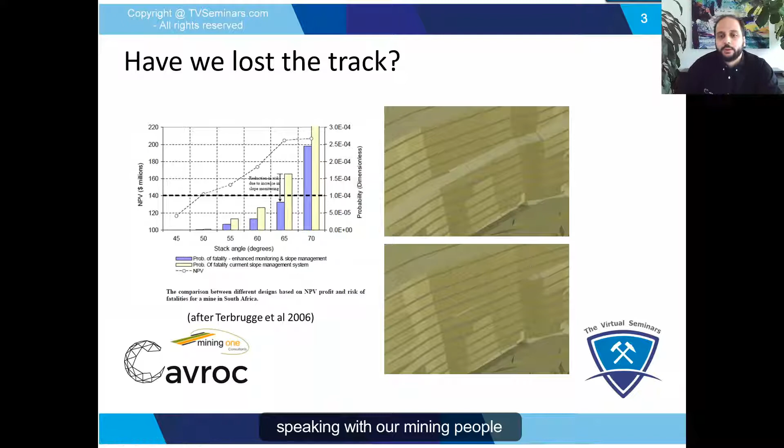The open pit example is another one. The one on the right-hand side is again a project that I was involved in, and the left-hand side shows a well-known paper that shows how much impact as little as a few degrees change in slope angle can have on the economic viability of a mining project. That decoupling berm you see there, as I said, we were involved with the analysis, and speaking with our mining people, adding that decoupling berm, which is a geotechnical berm, basically removes $50 million value from that project.

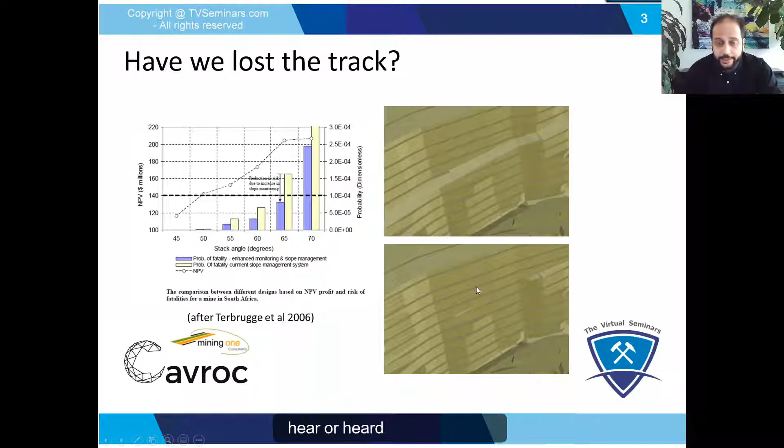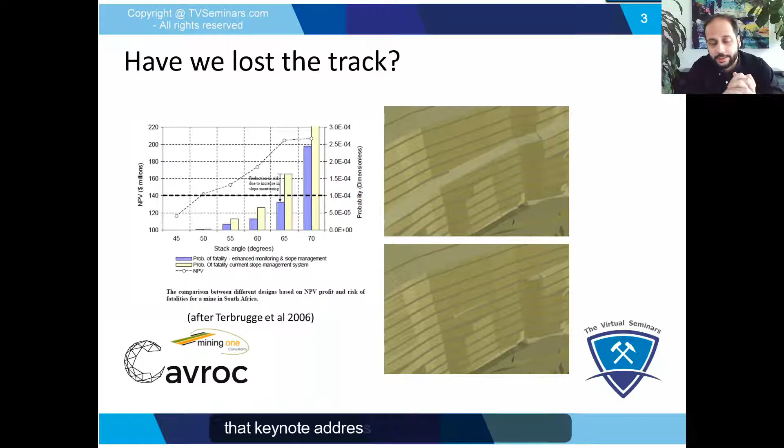When I heard these numbers more and more throughout my career, the last 15 years in consulting and in the industry, the first question that came to my head, and I think that's the main point related to Dick Stacey's keynote address, is: if what we do as rock mechanics practitioners and geotechnical engineers is this significant, are we actually confident that what we do is defendable, reliable, and accurate?

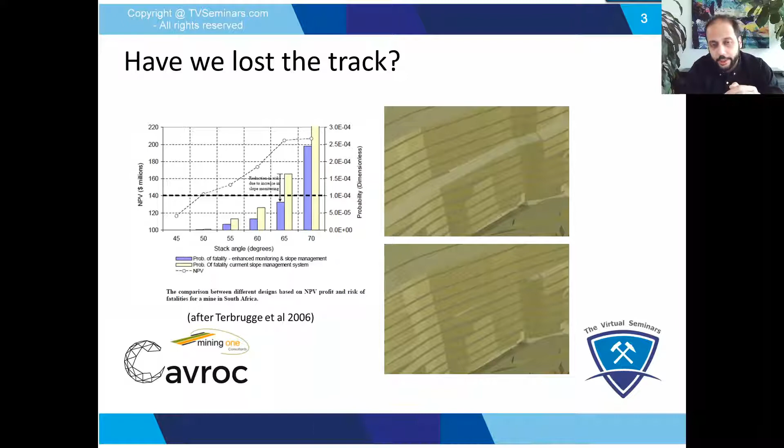Because the consequences, both from a safety perspective and economic aspect, is quite significant. But what do we do? So what is the state of practice?

Firstly, I just want to highlight that we are not trying to point fingers at anyone here. This is state of practice, used by all of us for design. This is what the majority of our industry relies on, because these methods are practical, faster, cheaper, and easier to learn and implement. But at the same time, a big portion of engineers know the limitations of these methods as well.

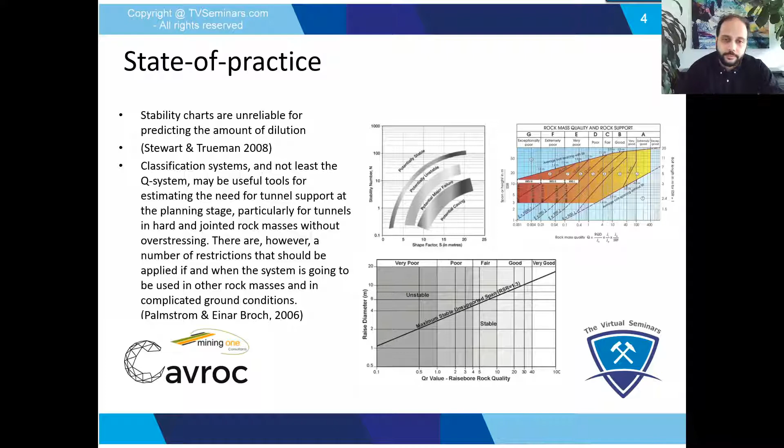Another example, open pits. Equally, we are using limit equilibrium and empirical methods quite frequently. It's pretty much the industry standard method. At the same time, many of us are familiar with the limitations, maybe less so the younger and newer generation coming into the industry. Again, as I said, it's because they are fast, cheaper to implement, and easier to learn.

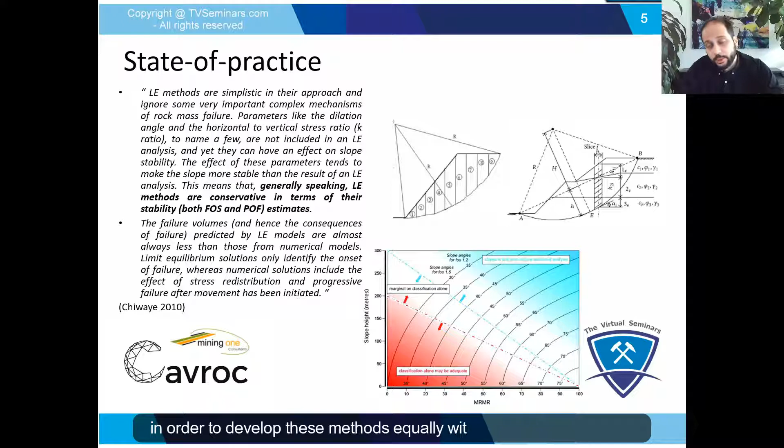But at the same time, there are limitations. In this case, for example, this is a thesis from Chiwaye, 2010, in South Africa, which did a really good comparison between limit equilibrium, finite element, implicit finite element, and FLAC finite difference methods, showing an honest, independent comparison. Some of the conclusions I found very interesting, for example, the conservative nature of limit equilibrium analysis in many respects, though as I'll show you, it can actually be exactly opposite in some instances, because of the simplifications that have had to be made in order to develop these methods, equally with the empirical methods.

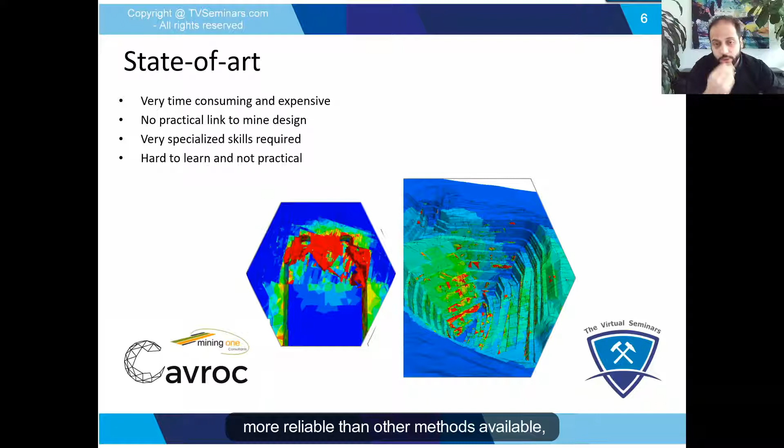Okay, so these are state of practice, but actually these are not the only tools available. There are actually more sophisticated, accurate, reliable, and cutting edge tools available, and I'm sure most of you listening are well aware of them. I prefer not to mention any software names, and this is actually what I've largely been doing for the last, I'd say, 15, 16 years of my career, using these software packages. They are quite robust, and the results they generate are far, far more reliable than other methods available. But at the same time, they are used by a very, very small population of geotech engineers and rock mechanics practitioners.

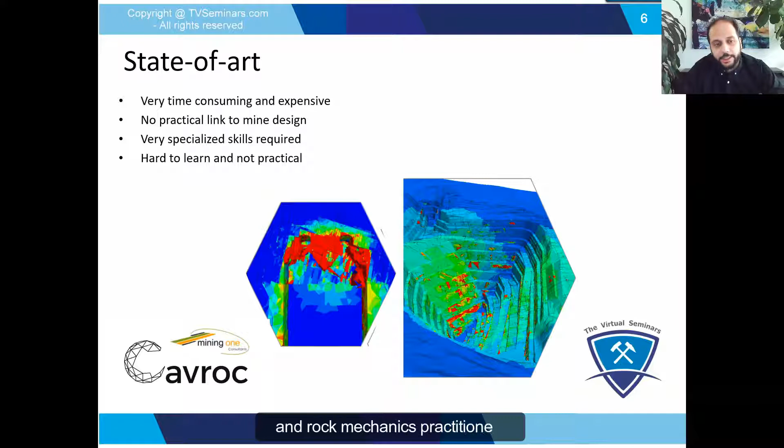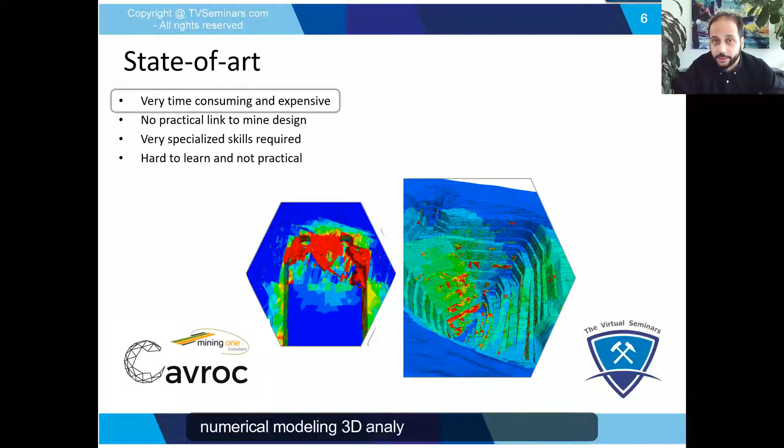First of all, because they're very time consuming and expensive. As soon as you tell a mine manager that you need to do a 3D analysis, numerical modeling 3D analysis or something like that, the first thing that comes to their mind is expensive, and that it's going to take 6 months as a minimum.

The second issue is that many times the results coming out of this type of analysis have no practical link to the mine design. There are pretty pictures, colorful images and things like that, but it's very hard to actually relate them when you look at the reports, with cross-sections and plots that for a mining engineer, or even a practitioner, are hard to interpret. It's hard to know how you can push things further, because the results aren't really telling you much. There's a few plots of stress and strain here and there, but what does it mean in a practical sense?

One other issue is the fact that many of these software packages usually need a PhD, or a few years of spare time, to be able to learn them. And after that, you're actually just ready to get into industry, get practical experience and start using them. So that's the issue, that they're hard to learn, and I don't think you can call them practical. They're slow generally to build and run, they're expensive in terms of the number of hours needed to operate the software, and finally, the fact that they're not easy to use.

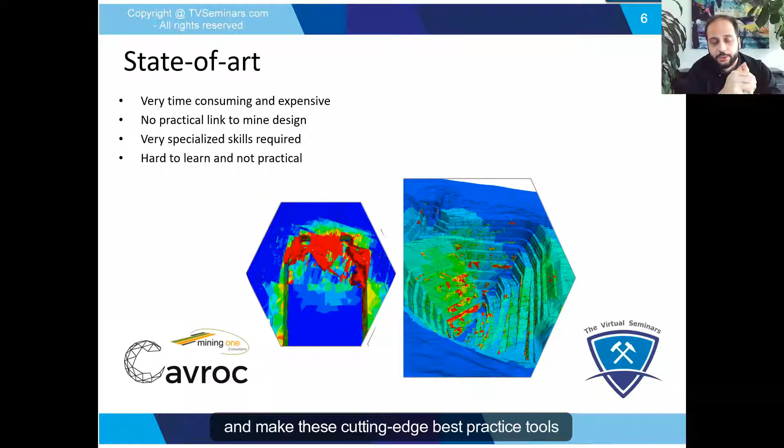This created a very small group of specialist consultants, probably myself included, which created this massive gap between the state of practice and state of art. In CAVROC, what we wanted to close was this gap, to make the state of art more widely accessible to all rock mechanics practitioners, and make these cutting edge best practice tools available to everyone in the industry, making it basically state of practice.

Now let's get back to that subject we wanted to discuss. This has been heavily advocated, especially in Canada in recent months, largely by individuals with commercial biases, advocating these wrong ideas, fear campaigns they call fatal flaw or other aspects. I just want to get down to facts and let you know the difference between the type of analysis that we do and those done in geology and statistical analysis. These two, in our field of mining engineering, sometimes get mixed up, because both geology and statistics are heavily included in our type of analysis in mining.

First of all, in statistical or geological analysis, you're dealing with data and predictive models that are closely related, because they are basically regressions in simple terms. There are predictive models trying to describe how a data population is distributed. This is a good example I usually refer to, and it's very valid here: when you are data limited, if you make more complex or complicated models, you actually end up generating more errors by making the model more complex. So the less data you have, it's better to have a simpler model, because the risk of creating more errors is less. You can see this in these three examples very clearly.

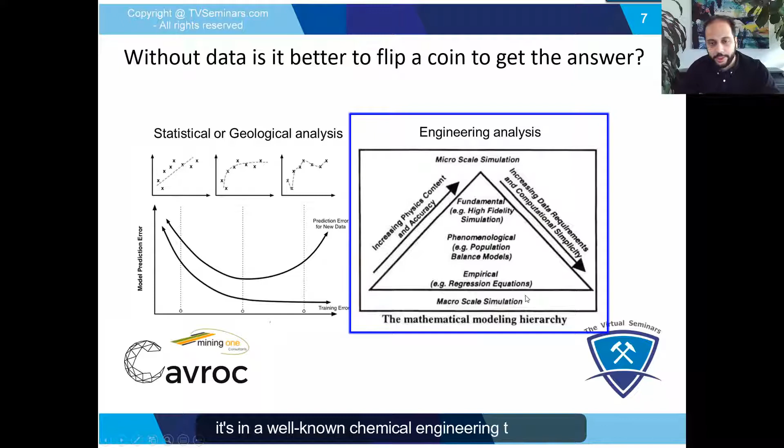It's from a well-known chemical engineering textbook. You can see that in our analysis type we have the same sort of things, but whenever you get into empirical or regression equations, you need more and more data, which also highlights the issues with many of our empirical methods that are very data limited, and still they're being heavily used in our industry.

But when you actually get into more fundamental models, which is numerical modeling, they require more understanding of the physics. So you need more reliance on your physics and mechanics understanding. The level of data required to develop the model is not as much, because it's more about understanding the mechanics and physics rather than just blindly looking at data and trying to fit a curve into it. So I hope I explained the difference between these two a bit better.

So when you're dealing with statistical and geological analysis, obviously the quantity of data closely relates to the reliability of prediction, but also your prediction method is reliant on the quantity of data, and its complexity should correspond to your quantity of data. But in engineering analysis, both quantity of data - your input parameter - and the prediction method and its complexity, both equally impact the reliability of the prediction. Under no circumstances can you say that because you don't have enough data, your model should be as simple as possible. I give this example.

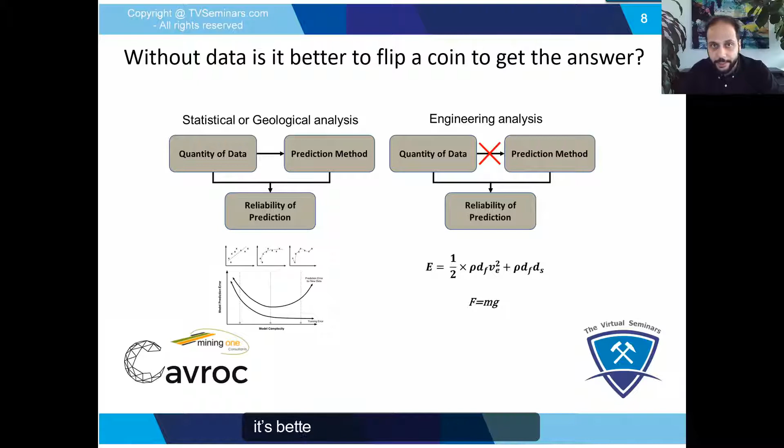This is a kinetic equation we use for dynamic support design, F equals mass times gravitational acceleration. Imagine in one of these fundamental equations we say that because we don't have enough input data, it's better to just eliminate one of these variables, let's say the mass or gravitational acceleration. That's exactly the same as saying, if we don't have data, it's better to flip a coin to get the answer when we want to design.

And to get into another aspect of this discussion - what's more important to be advocated and promoted is that for engineering design, it's about how fast, how cheap, and how good it is. And obviously that needs to be dependent on the level of study we are doing as well.

But if you can have a much more accurate and reliable fundamental numerical model that you can run as fast as the simple one and as cheap, basically the same price, it's a no-brainer to go to anything other than that.

At the same time, because of the limitation of data at early stages, you'd expect less reliable outcomes, but that's because of the lack of data, not because you added errors on top of that into the predictive model.

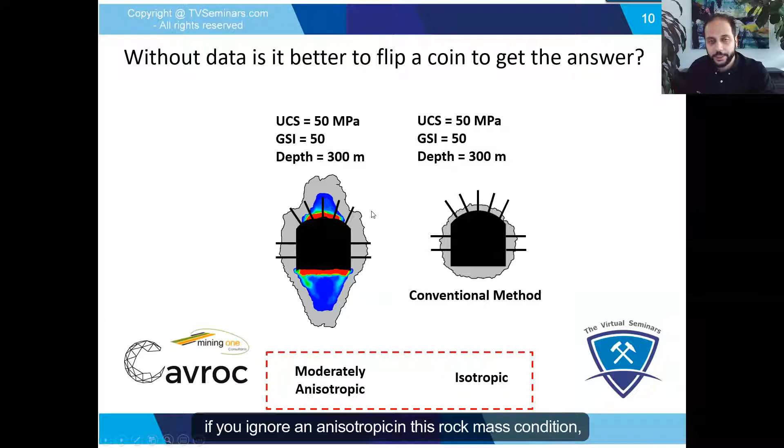I'll give you some examples. You see here, two tunnels, everything the same: UCS, GSI, depths. What's different? Whether you have data or not, if you ignore anisotropy in this rock mass condition, right from the beginning you are causing significant errors and waste of potential.

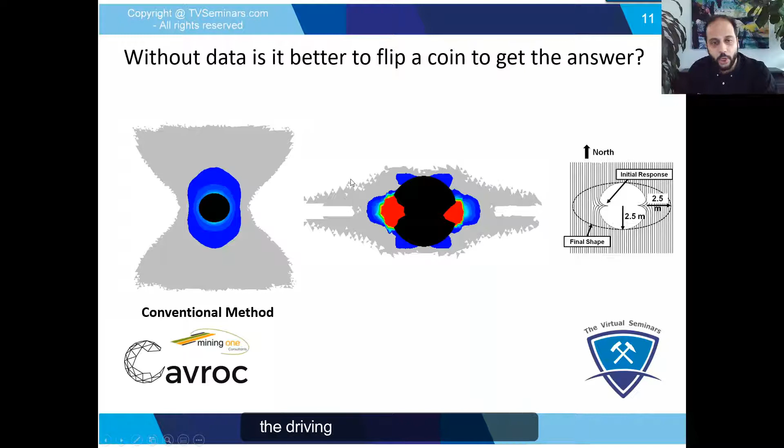Another example here in foliated ground. Imagine, whether you have data or not, how could these two predictions be the same? Yes, if you have less data, you might not get the extent or severity of damage as much, or you might be conservative, but not that you get it entirely wrong — the failure mechanism and the driving force fundamentally wrong.

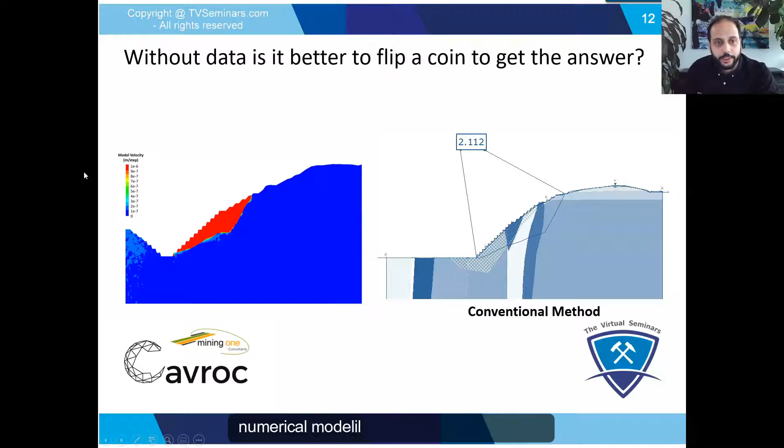This is another example in an open pit situation. The limit equilibrium, with exactly the same data, accounts for strength and anisotropy, giving a factor of safety of 2.1. The slope was actually a historical slope — it failed. Using exactly the same material parameters in a more reliable finite difference numerical model, it basically suggests failure, so factor of safety less than 1.

Another project I was heavily involved in, there's a publication coming for a slope stability conference in a few weeks. In this case, looking at empirical methods, limit equilibrium, and even implicit finite element, the factor of safety was marginal — either less than 1 or marginally between 1 and 1.2. This was before the pit was excavated, and with a more sensible analysis, the factor of safety for a large-scale failure was more than 1.3.

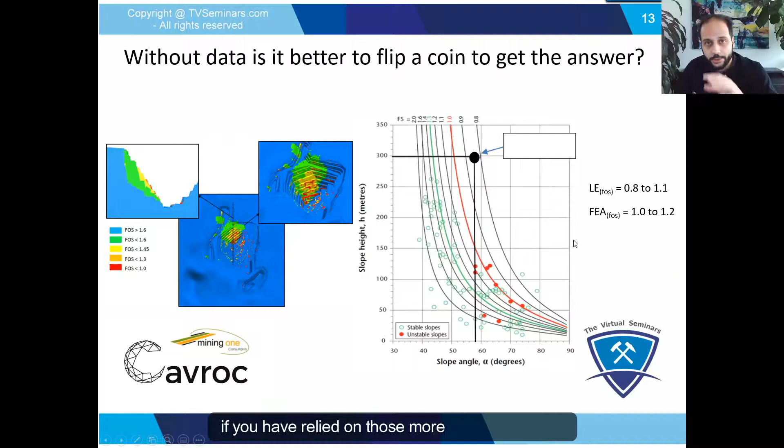Certainly, you will see more publications of the mine being operated and finished with no major issues, successfully completed. Imagine the amount of waste and loss of opportunity if you had relied on those simpler methods right from the beginning of the study.

Okay, let's wrap it up. We identified many problems, but we need to provide solutions as well. Hopefully in CAVROC, that's our aim, and we hope we can fix some of these things.

But for this presentation, I guess to wrap it up, the important thing is that as rock mechanics practitioners and geotechnical engineers, we need to shift our focus from anything else — whether it's the angle of a crack going here or there, or a micro crack in a certain part of a rock — to what we were here for in the first place: safety, and to make mines more economical, efficient, and optimized.

I might be wrong, but I think we are not focusing enough in our research and development to close the gap between the state of art and state of practice. I think we should do a lot more in that area.

As practitioners, we should look outside the usual sources. We shouldn't just rely on X, Y, or Z just because big names said something, and we should always question the limitations of any design method, including our software, equally — all of them. Make sure you understand the limitations of the tool you're using, which gives you a much better understanding of how to deal with it and present it to a mining engineer or mine manager.